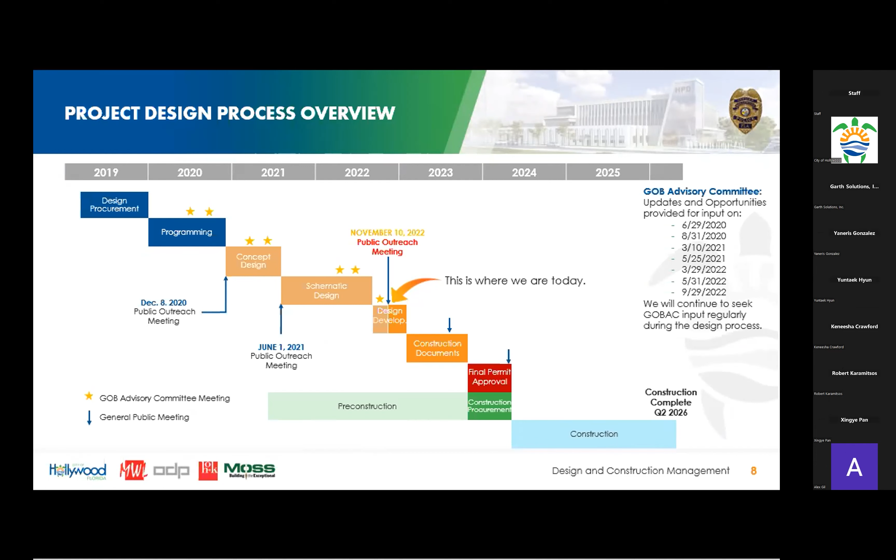At the first public meeting, we asked for your input on the vision for the project overall, and we gathered information on how you anticipate using the overall site. The priorities expressed by the public at that first meeting were to have a welcoming police headquarters building that's open to the community.

With an inviting and well-landscaped space, making the building a real community landmark. At the second public meeting, we received additional feedback that the community was looking for a buffer space between the proposed police headquarters project and the community to the east, extending up to Hollywood Boulevard, providing buffer between the community and any future development on the site of the existing police headquarters building.

All of this input has been taken into account as the design team moved forward with the project design. Here you can see the overall site plan for the new police headquarters project. You can see Hollywood Boulevard to the north, South Park Road on the west, and Entrada Drive on the east. A buffer of green space has been added between the new police headquarters and the adjacent community.

In response to these public comments, the dry retention and buffer area extends up to Hollywood Boulevard, providing a landscaped area screening both the new police headquarters building and any future development to the north. This area will be dry most of the time, but during storm events, water will temporarily accumulate in this area to allow it to percolate into the ground and meet water quality requirements before it's discharged to the next stage of the stormwater management system.

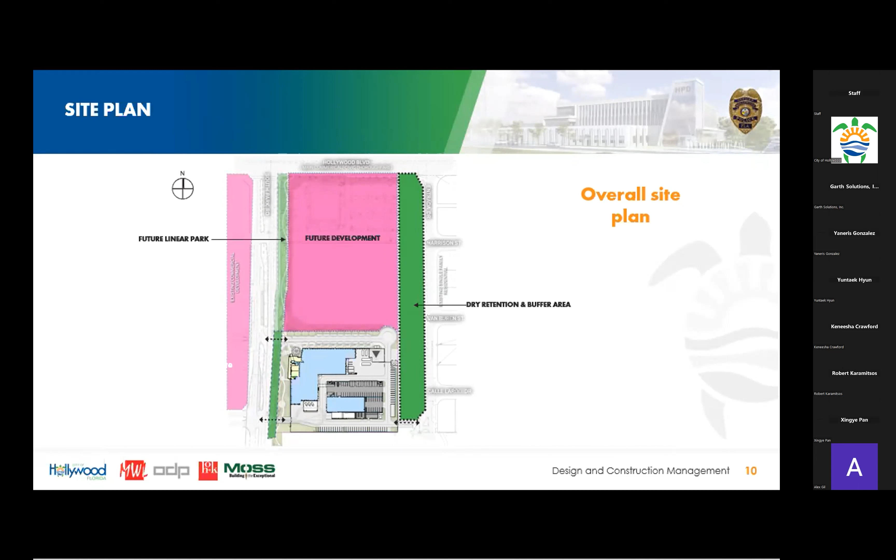To the left of the site, you can see the linear park adjacent to the new police headquarters, which will be designed and constructed as part of this project. The concept is for the linear park to ultimately be extended all the way up to Hollywood Boulevard in the future once the northern side is developed. And now I'd like to turn the presentation over to Ed O'Donnell to discuss the site plan in more detail.

Thank you, Heather. Does this work? This way. No, you can't hear me, huh? Okay.

Oh, great. Thank you. So good evening again.

This first slide that we're showing you is our floor plan, which is the addition to our site plan. You can see the building is massed with a one-story wing to the north and an L-shaped three-story wing to the south and to the west. It also has a three-story secure parking structure within the facility that'll be used for police services.

You'll notice that the site plan has 3 entrances and exits. The one to the north is for public access to the building.

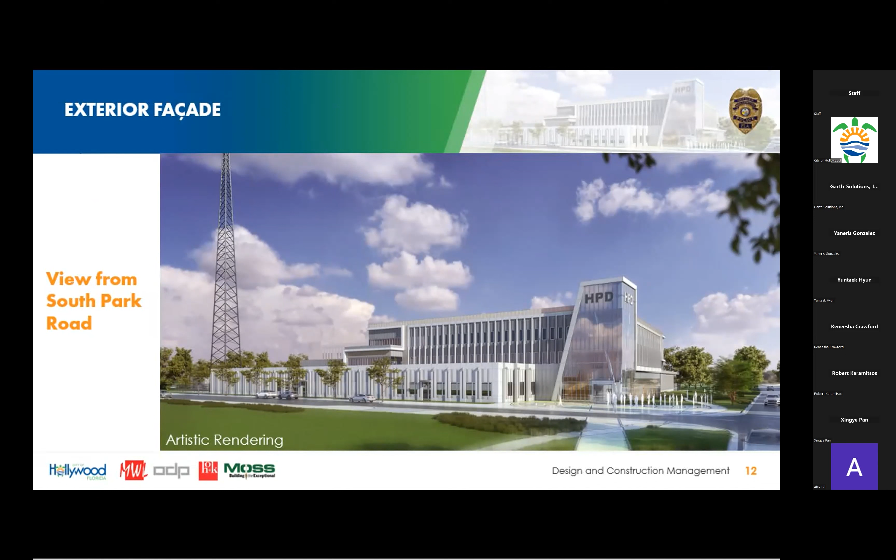So this building has a one-story mass along the north side of the building to give it a human scale, and a 3-story setback massing for the rest of the building. You'll also notice that there's a tower element that speaks to civic pride and creates a landmark location for defining the public entry. Next slide, please.

So this is the South Park Road side of the building. You'll notice that the architecture of the building, the public entry along the tower, is a very transparent glass. And you'll notice that the police functions beyond are in a more secure location with more limited views. You'll notice that the one-story human scale is translated across in a horizontal element that runs the length of the site.

It should be noted that since we're only showing the building tonight, the trees on South Park Road are omitted from the rendering, but they are not going anywhere. Next slide, please.

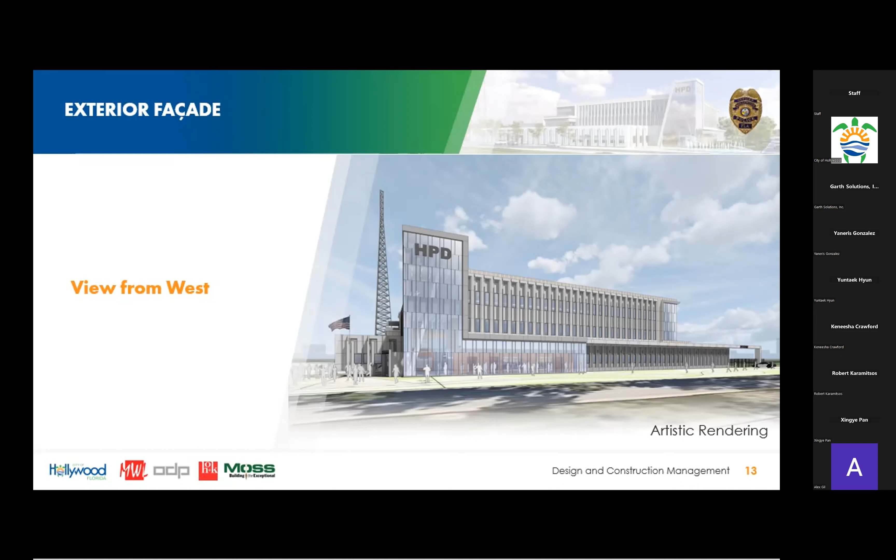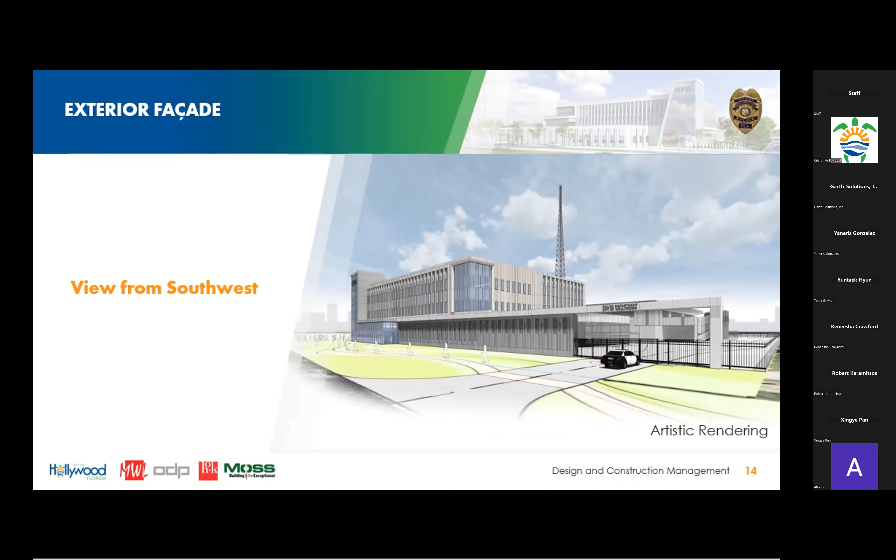This is looking north along South Park Road, and this is what the secure entrance for the police department vehicles is going to look like. You can also see the beginnings of the linear park along South Park Road.

This slide is the entry plaza. It's a very important plaza. It's where the police department and the public first meet each other. On the circle is the location of our memorial, which is going to be very similar to what is on the existing building.

John, would you like to? The memorial will be designed very similar. There it is.

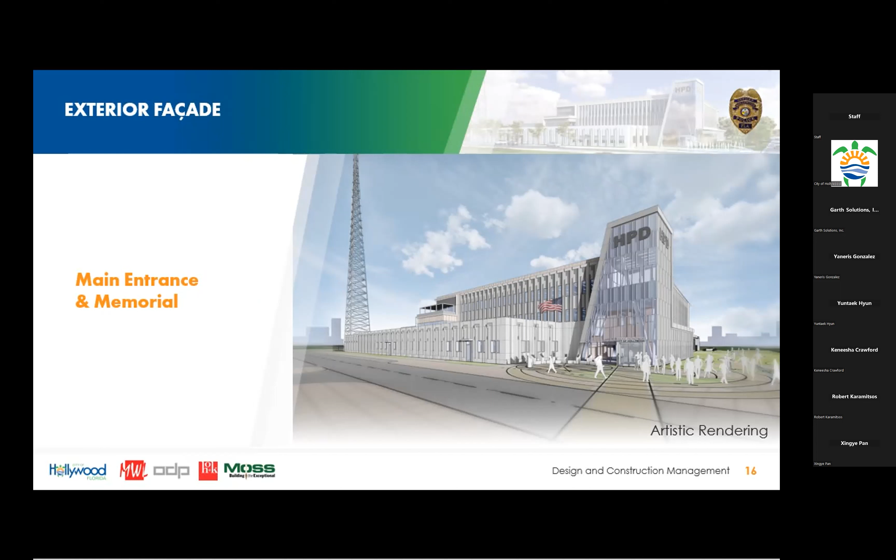So this is the public plaza showing the police memorial. The memorial will contain bench seating and contemplative spaces, also beginning to see the linear park down South Park Road. Next slide, John.

Hello, I'm John Marino. I'm the major in the Community Affairs Division, and the new police department comes under my purview. I've been on this project with this crew, and it's been fantastic going through and seeing what's going on. I've been in Hollywood for almost 27 years as a police officer, and lived in Hollywood for almost 20 years. So this project directly affects me, and I really appreciate what DCM and ODP and HOK and Jeff and the rest of the crew are doing on it.

So we just wanted to go over something about the community room. We wanted to have the police department and the community collaborate. Here you see the existing community room we have right now. Many of you have been in it? It's about 950 square feet.

If you look at the new one, it's 1,600 square feet. We can actually divide the room. There's a pre-function area, and there's a larger lobby for the front.

I know Ed talked about it earlier. So if you look on this side, you walk in and go right to the records room. And then you can also have homeowners association meetings.

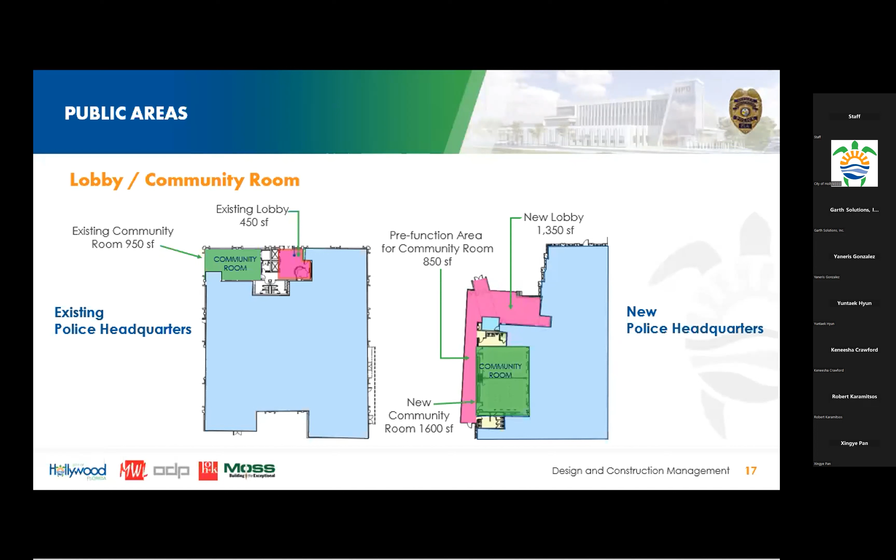And we also have, like I said, for what we just had in the past with the hurricanes and everything else, there's going to be rooms in the back for kitchens, and officers will be able to come here and stay in this room as well if need be. So the room is going to be much more a community collaborative effort going forward, and we really hope that this brings the community and the police department together more. And if you saw the renderings, all along here will be windows as well to the community on the outside. I'll be available for questions afterwards too. So thank you.

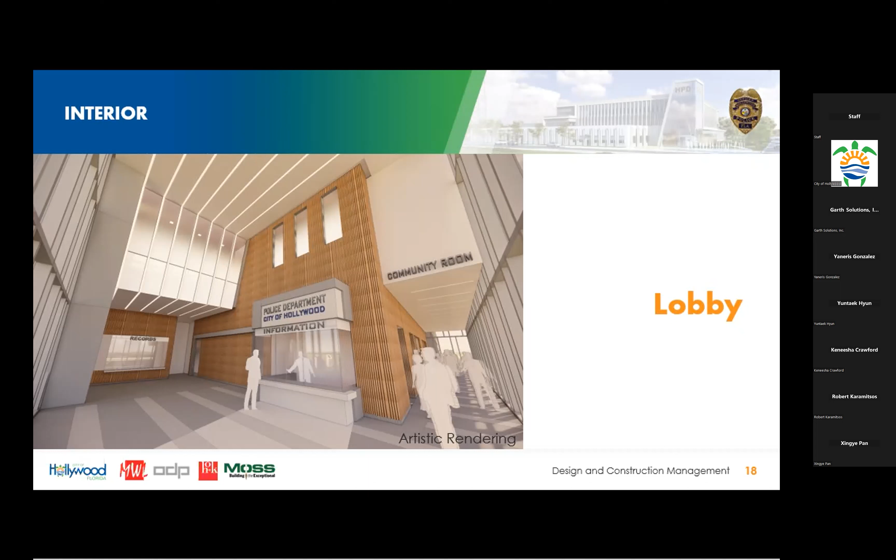And the last slide, please. This is in the lobby the other direction. It is again transparent to the outside, where we'll be looking at the linear park. And that is reflected in some of the architecture where you see the tree-like diagonal columns. Next slide.

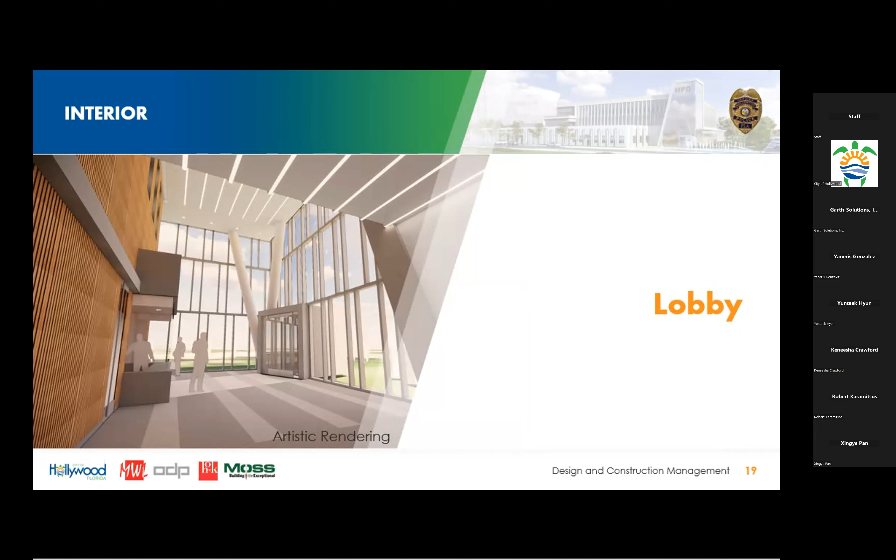Robert, are you with us? I'm here. I don't know if I need to speak to the sustainability. Can you guys hear me? Hello? Hello? Robert Karamitsos? I can hear you. I don't think they can. Do you think they can hear us? I can hear you. I wonder if the public can hear, if we're just in this thing together.

I apologize for not being able to be down there with you tonight. It's been a labor of love with all of the participants. We at HOK echo the sentiments of everyone on the team that has been working together. I know when we first interviewed for this project, the community outreach was an important aspect of

the police department's aspirations for the project, and we've embraced that wholeheartedly. One of the things we're also proud of at HOK is our sustainability. We're one of the leading architectural firms in sustainability, and we are taking the lessons learned that we've had over the many years and applying our innovative sustainability process to this project. And rather than just checking boxes and things, we started off at the very beginning to analyze the site

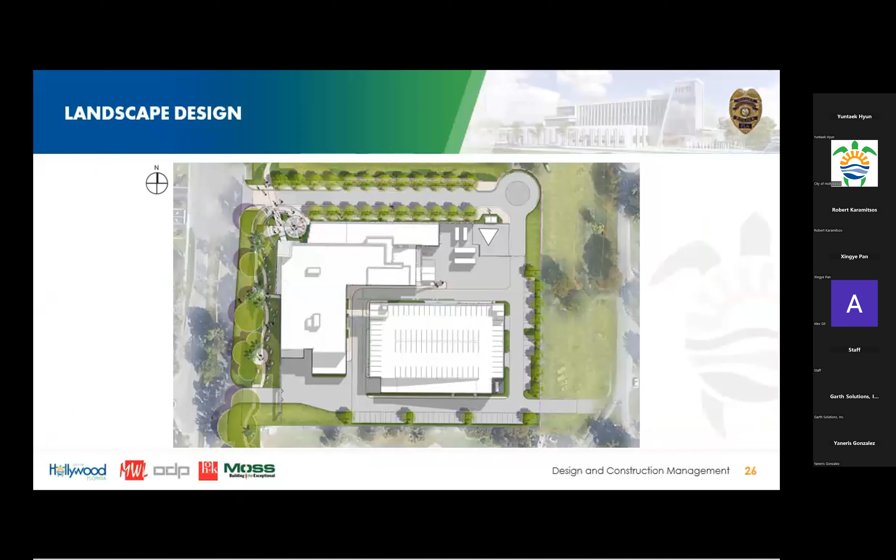I love the linear park, and one of my concerns is safety. On the linear side on the road, is there going to be either a landscape buffer or something hard so that some terrorist or crazy person wouldn't be able to drive their F-150 Ford truck straight into it?

Yes, you're spot on. So it's under design and review now, but there will be some topography and undulating landscaping, as well as secure bollards around the building so that folks can't easily get into the building. It's something that the Chief and command staff have worked with us pretty heavily on. So that's still under design, but there will be some security.

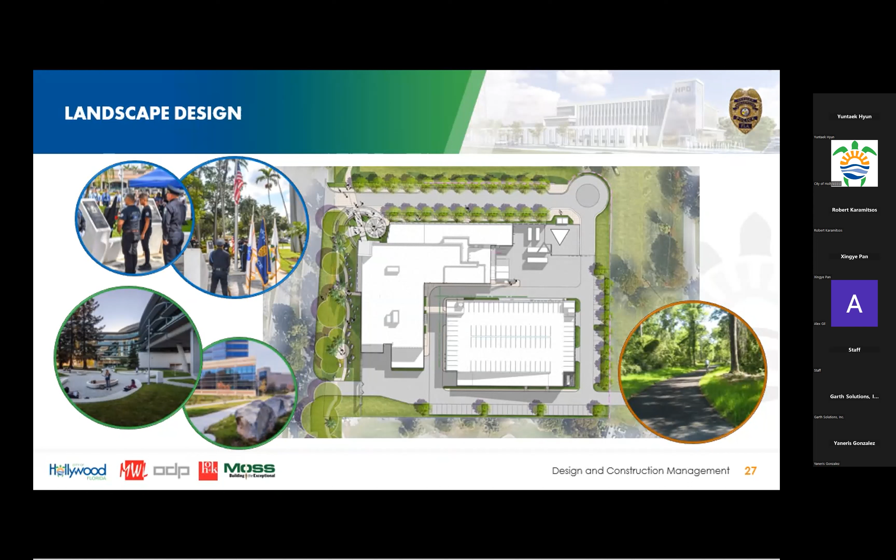In a previous rendering, there was a retention pond put at the north side, the flat corner of it, north of it. They showed that, and it doesn't exist now. Correct. And I'm not saying this for argument, it's just that the code says water must be retained on site.

But the Orange Brook property is on the south end. That's not on site, but I understand the purpose behind it. Yeah, so I'm not opposed to it, and it might even work with other things that are going on.

At that point, we hadn't done the complete calculations and analysis. The retention to the right there, the green space, that's dry retention — that's more for water quality than quantity. Kimley Horn and Stefano's team finished up the design as far as how deep and how wide that pond needed to be for the actual stormwater. We know that now, and that will be coordinated with the Orange Brook project.

Yes, there is a lake right there, and that's not the final location — I think Stefano mentioned that. That's just a graphic to show the depth and width needed to retain that amount of water after the calculations. The idea is to work with the Orange Brook design team to ensure it's designed within their project. It could be a lake, a water feature, or two ponds, but we now have the calculation and know the size and depth needed.

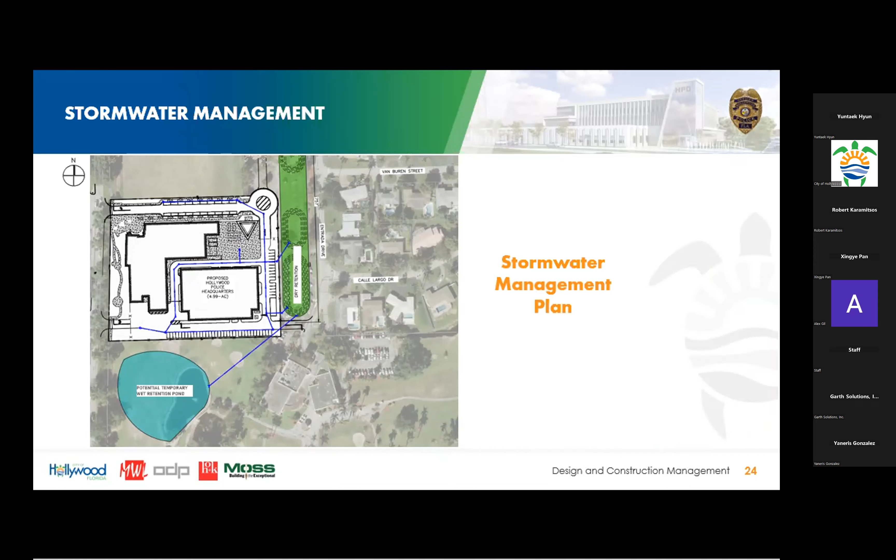There's no plans currently. I think Mayor Levy gave us some more context tonight that there are some possibilities for that area, but there's no planned projects currently.

Even though there aren't any plans, are there things that are ruled out already for that spot? There are, like an arcade or amusement park or something. I assume you've got some things that will not be considered. Correct. There are some deed restrictions we have to follow, and certainly there's some things that the city would not entertain in that area.

It'll be a public space, yes. Is there any space for the public parking? Like if we have to go there for some reason? Yep, absolutely. Let Ed talk a little bit about that. You can see the public parking contemplated to connect to whatever future development there is. It is to the north of the building.

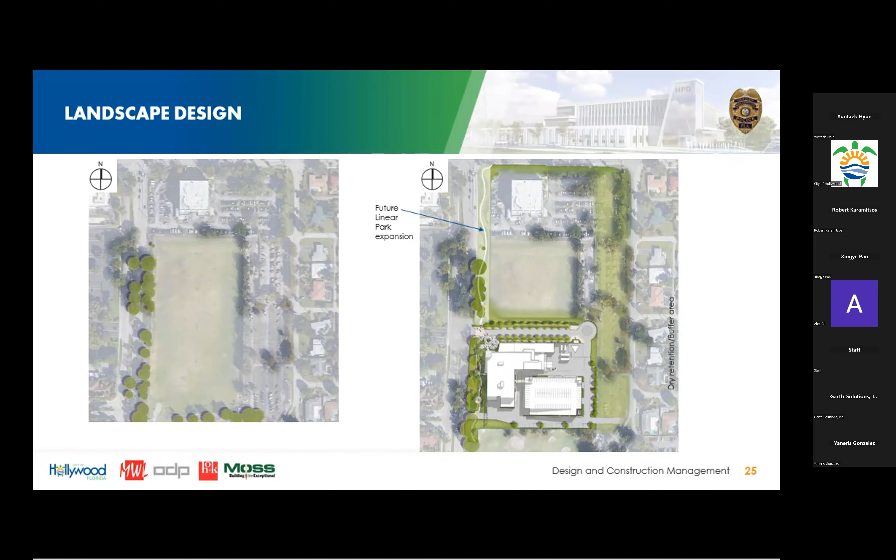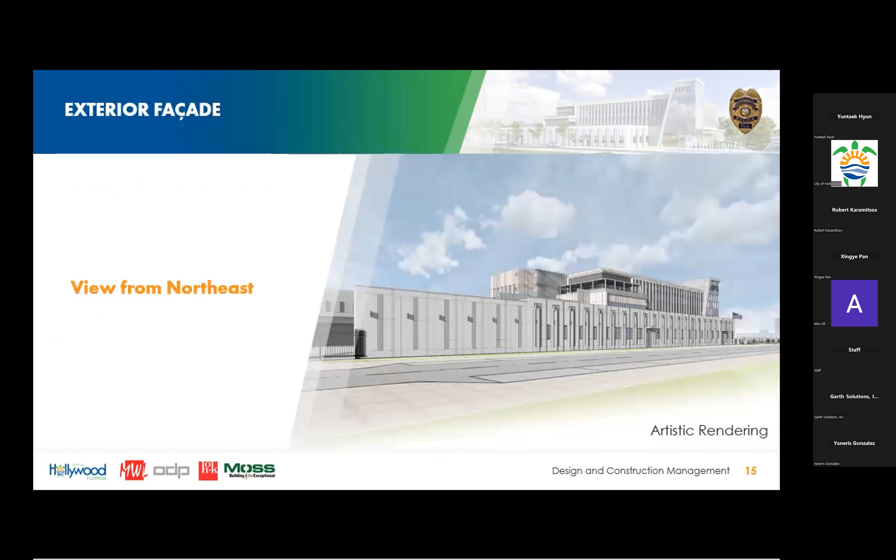So it's to the north of the building, the public end being on the side. The public parking is along here, and there is a roundabout to bring you back out to South Park.

And there are special events for the community room. Our understanding from a previous meeting is the area where the parking garage would be opened up for events, like our civic association meetings. After hours events and events for civic association meetings, we're talking through now. Yeah, obviously we've got a large community room and we expect the community to come, so the parking garage we will control. If we're having an event where we need more parking spaces than the couple dozen in front of the police department, then the community will have access and we'll have personnel down there to guide specific parking.

No, that's why we're here. I have a question regarding the new tower. Will that be part of the future plan to be able to dispatch from there? Because I've consistently brought this up—I have called the police for emergencies and let it ring 48 times on a Saturday, and I had to call 911 just to report loud music coming from the JCs because I couldn't sleep.